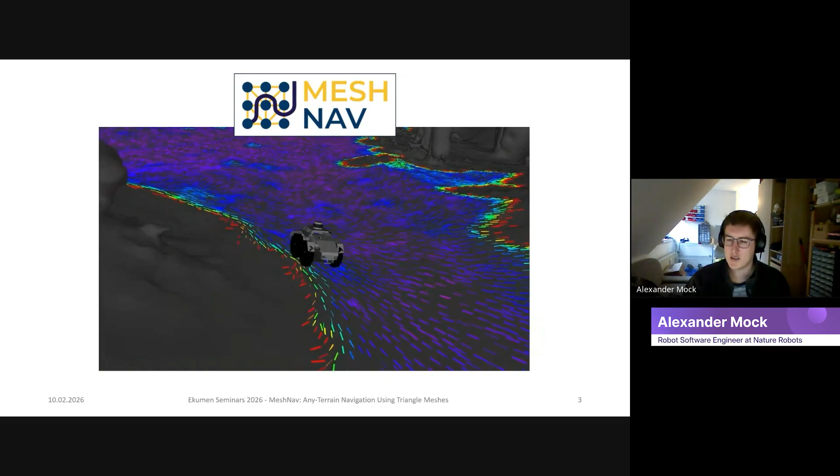But this talk is not so much about me, but about the mesh navigation project, MeshNav. And here you see a video. This is essentially the product of work that is 10 years old. There was a PhD student in my lab when I was a bachelor's student. His name is Sebastian Pütz. And he started to build up this project in 2015, so about 10 years ago. He started to use triangle meshes as representation of the environment, because he thought this would be a smart way to do it. And you can do a lot of cool things with this representation. This is what my talk is about today.

I will tell you why this was, I would say, a good decision to choose triangle meshes for navigation in any terrain. I will start to give a short overview about the theory and what is currently there in our tool set. I will continue giving you some insights about design decisions, how we wrote our software and so on. This helps you perhaps to understand how to write plugins or use it as a software developer.

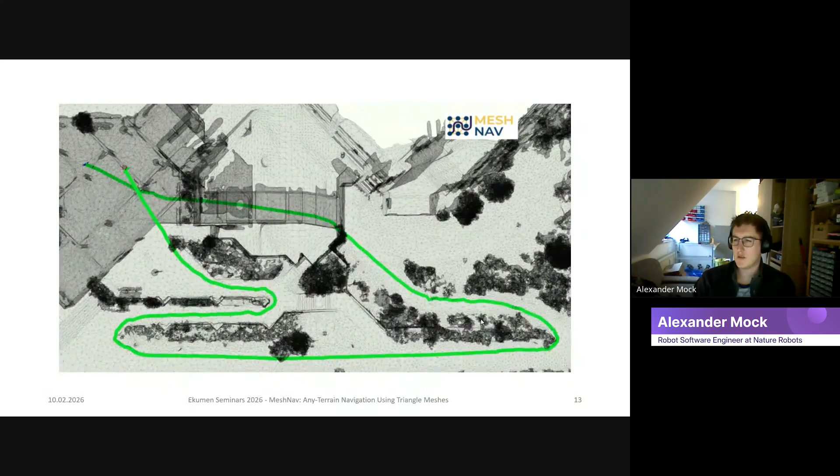As you can see here, once we have this plan and the vector field, we can use the vector field controller to execute the plan. The vector field controller is already implemented, and like the planners, these are plugins. You can also write your own controller or planner. But this vector field controller we already deliver with our mesh navigation repository to start with. It just takes the vector field into account and gives control commands based on that.

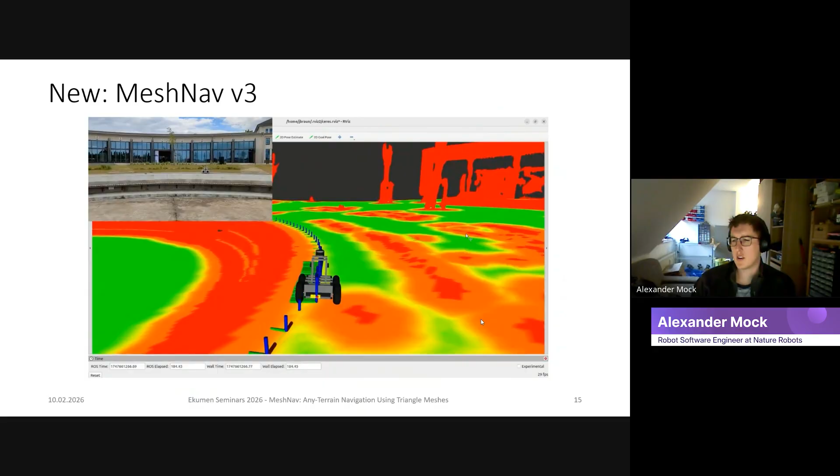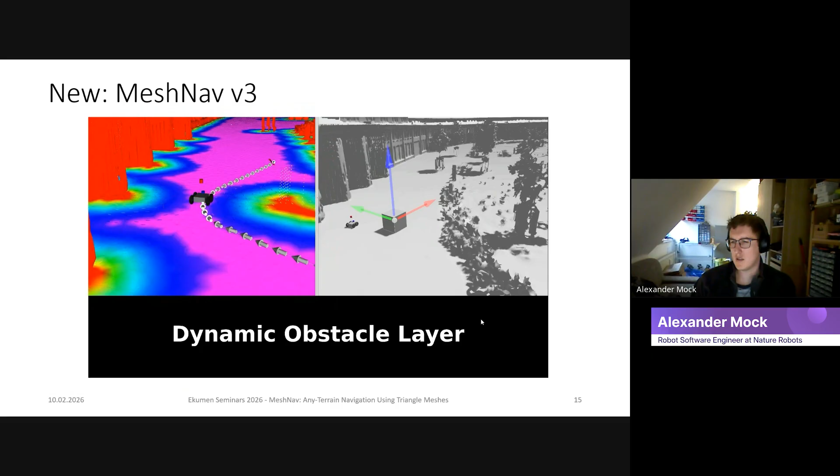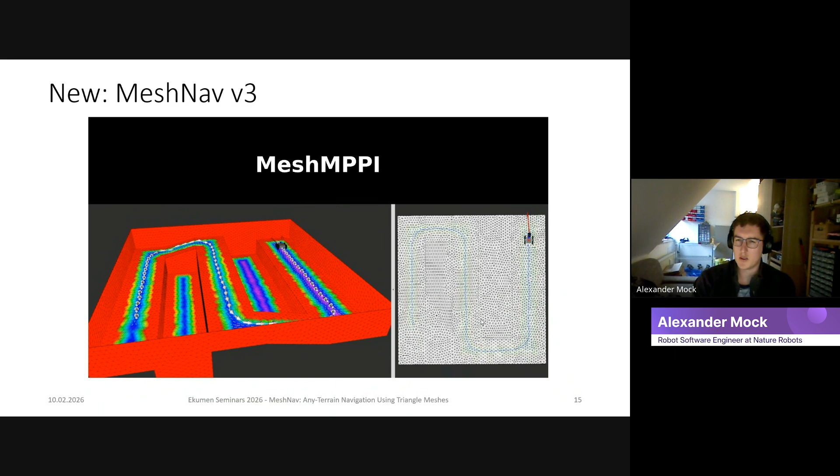And the latest thing we added is, first of all, you see some real world experiments with a small research robot, and we're driving next to a very dangerous abyss. So it could fall down, but it doesn't, just because of the cost layers we added. We added dynamic cost layers here for obstacle avoidance. And we added a model predictive control, which is very new, to make the motion more kinematically feasible. I will come to that later. This is the last chapter.

Also, we have a lot of tutorials there, so check it out if you want. I think over the past half year we made a lot of progress in writing tutorials, also with real world maps. So we scanned a lot of actual worlds, put them into Gazebo, and you can download them and check them out. So that was the overview of what we currently have.

And now it gets a bit deeper. Part 2 is about the software insights. This was learning in progress for 10 years.

As you probably know, when you're writing software, you make a lot of things wrong. And I'm especially very proud that this little project has existed for 10 years. And this is because we learned a lot. And one thing is what you probably already know as a roboticist: we don't want to reinvent the wheel. We look first and act second, like our robots are doing it.

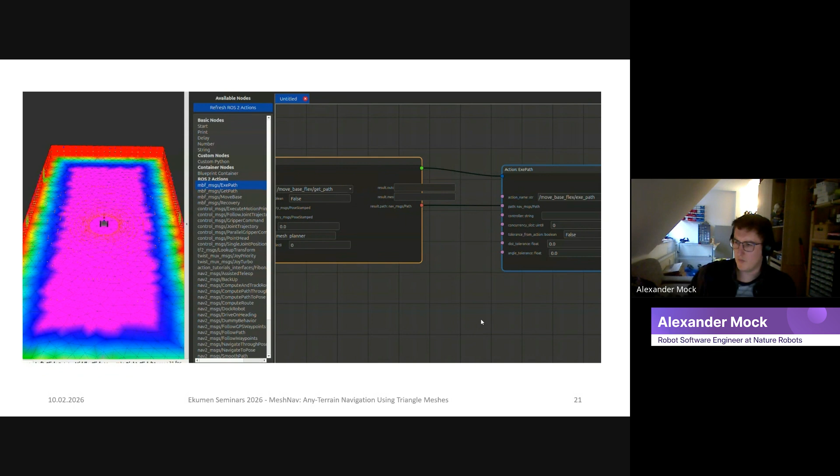So I brought a small example. This is a state machine or some kind of a state machine. On the left side you see the mesh, on the right side it's the state machine, and I connect some things. So wait for pose, get path, then exe path. So this is the most basic state machine you would have for navigation with the MoveBaseFlex action interface.

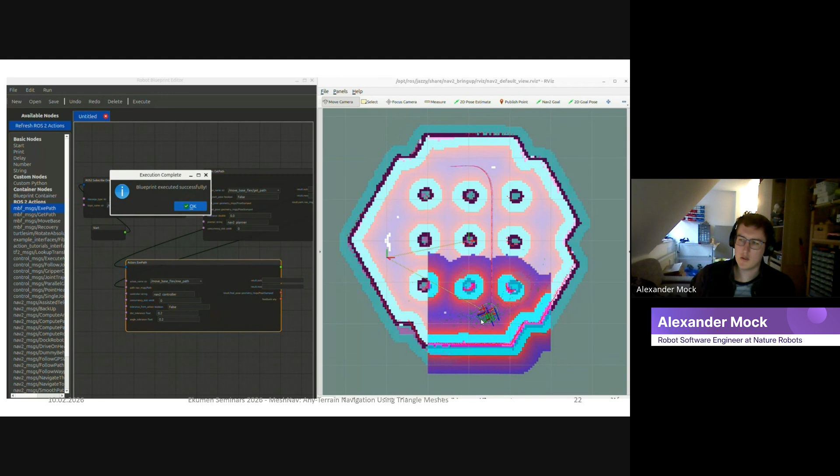And once my pose is drawn in RViz, the state machine is triggered. This is for the mesh part, and now remember how it looks. This is the state machine for nav2. The same action interface, but we just changed the action server and the planner strings. So in this case, the planner is called nav2 planner and the controller is called nav2 controller. On the previous slide, it was mesh planner and mesh controller. And we can control the robot in another world.

So MeshNav also provides code interface plugins, as I already said before. So if you specifically want to write plugins for meshes, like planners, controllers, or cost layers, you can do that.

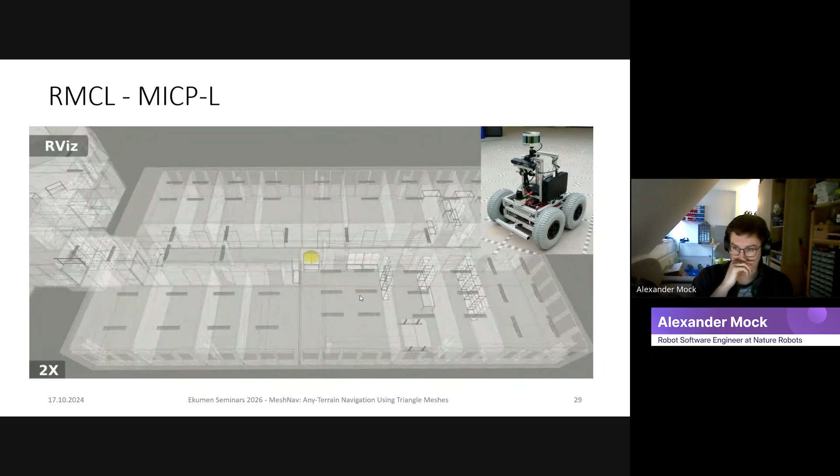And we computed the sensor model via raycasting in a virtual scene using our rmagine, again with established libraries that are already there, and it's very, very fast. So you can see here, for example, the registration part of the localization. We draw an initial pose guess, and the robot is corrected towards the map so that after that it's localized

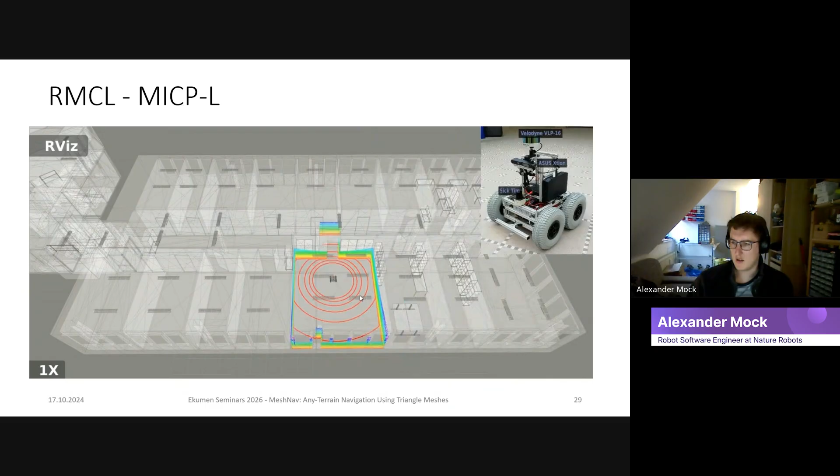using LiDAR scanners, for example, but depth cameras are also possible, as you can see here. It also considers the motion of the robot. We can also use 2D scanners in combination with our wheels, for example, which is quite useful, or any combination of any sensor we have.

And since we are using libraries like OptiX and Embree, we have a really fast runtime. As you can see here, it's an example of the MulRan dataset. It's 21 million vertices and 12 million triangles. It covers an area of about 1,000 times 700 meters, and still we can reach real-time

localization even on CPUs. We couldn't do that if we had started to implement all the things on our own. Intel did a very good job on Embree.

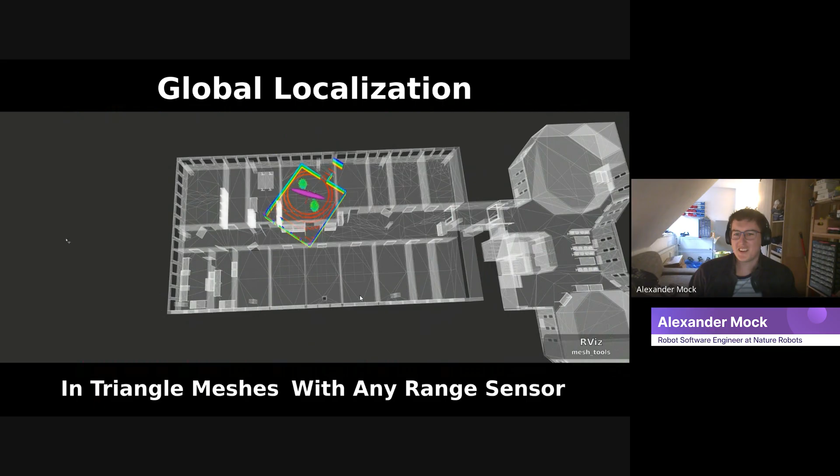And the cool thing is, if something is uncertain, it stays uncertain. This was a thing I was very particularly interested in. If something converged, then we started to estimate a covariance around it so that we can use it for other software that relies on unimodal state representations.

Uncertainty. Once we are localized, now we come to the obstacle part. We directly have correspondences with the map, because we already computed them. As soon as we have them, we can just apply some filtering. As you can see here, every point that belongs to the map is now filtered out.

And we call the points that belong to the map expected points. But there are also points that are not expected given our prior map. And this is, for example, the people. One of them is me, by the way.

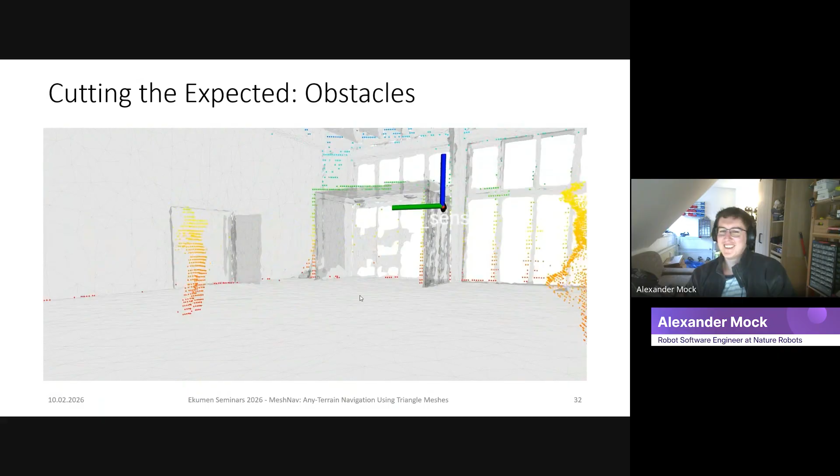Yes, and you can use them and project them down, and then you can create a dynamic cost layer out of it, and that's it. It's very fast, as you can see here. It reacts directly when something is hit, but

there comes the problem. We had to change some things. Normally, you have a large map, and you detect one specific obstacle, and then you start to create some inflation around it. So this is what you want to do. But if you recompute the complete inflation of everything, then it takes some time, and then we have reaction times that are too high to react to certain changes.

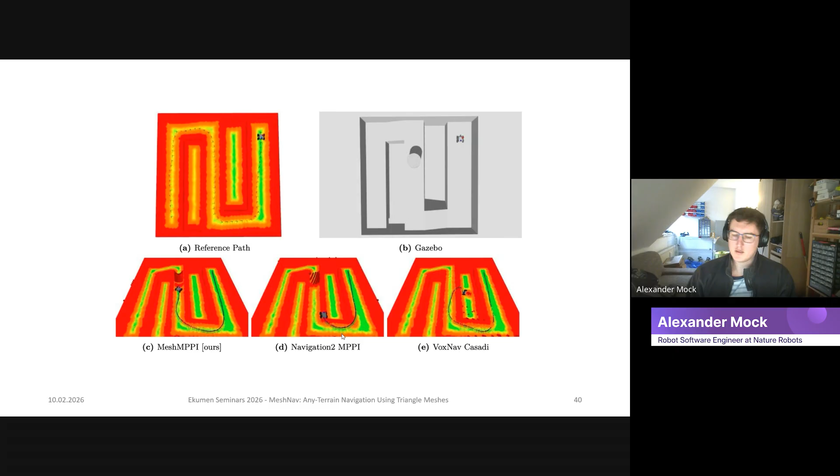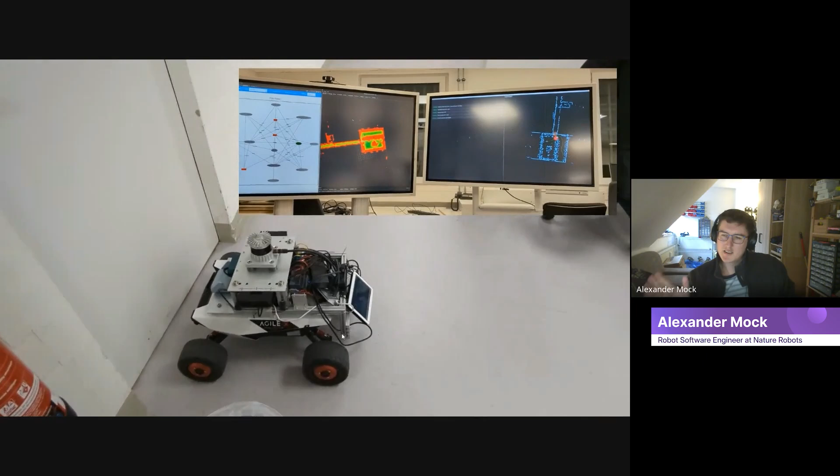And this is the last part. Currently we have a small study group of students and they used the mesh navigation in the basement. There the robot is driving through a door and detects, hey, the door is closed, but in my map it's open. And this is something really cool about the 3D approach as well. Even though you have flat ground, you can have a rich understanding of your world.

Blue points are points that are unexpected, so obstacles. And in this video, you see that the door is closed. In the map, it is open, and the red dots are marking points where the map is unexpectedly wrong. So you would scan through these points in your map. And these red points would mark an area where you can start to adjust your map a bit, so systematically change your map. We haven't done it yet, but the filters are there.

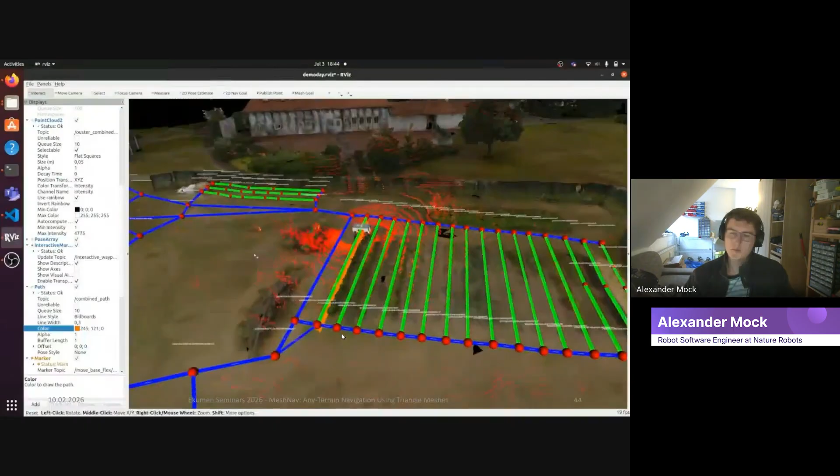Also at Nature Robots, we like to use it to encode some information about uneven terrain. Here you can see our Lero 2. So this is version 1 before. Right now we have Lero 3 built up, and here you can see mesh navigation in combination with a waypoint graph that is used for planning.

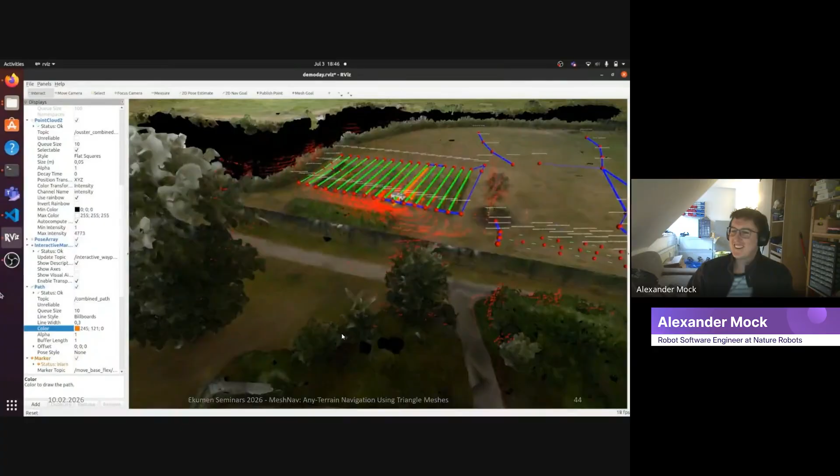And yeah, so it drives over some beds. You can also see here some sensors that are used, like GPS and an Ouster laser scanner. Also some solar panels on top to increase a bit the battery capacity. It can also drive through mud, as you can see there. Yes.

Yeah, the 3D model is still the Lero 1. This was a demo day. We hadn't had any time to create the new 3D model there or to include it. And now it's driving back home, to its garage. And that's it. Here are the worlds again, you can find them in the tutorials, and the robot is driving towards you.

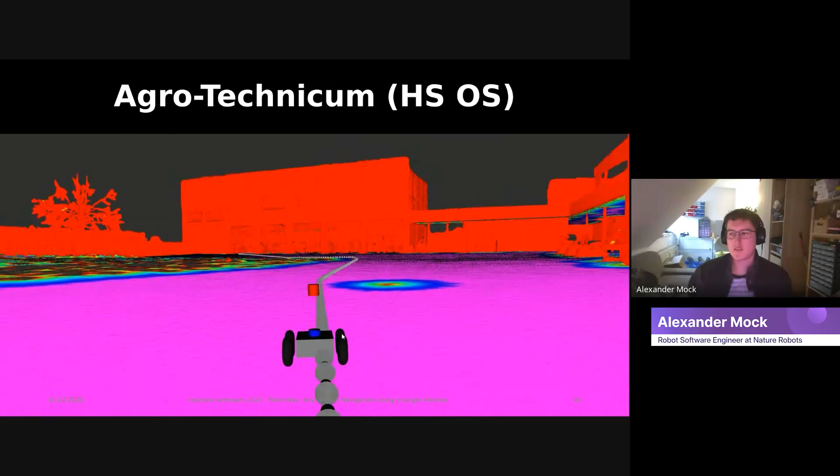So if you want to help with this project and keep it alive for another 10 years, feel free to contact me or just contribute. I would be happy to see people contribute to this project in any way. It could be something like reading the tutorials, reading the documentation, adding something to the documentation, testing this thing in the real world, finding bugs, anything you want to do would help us. So you can contact me anytime, and that's it from my side.

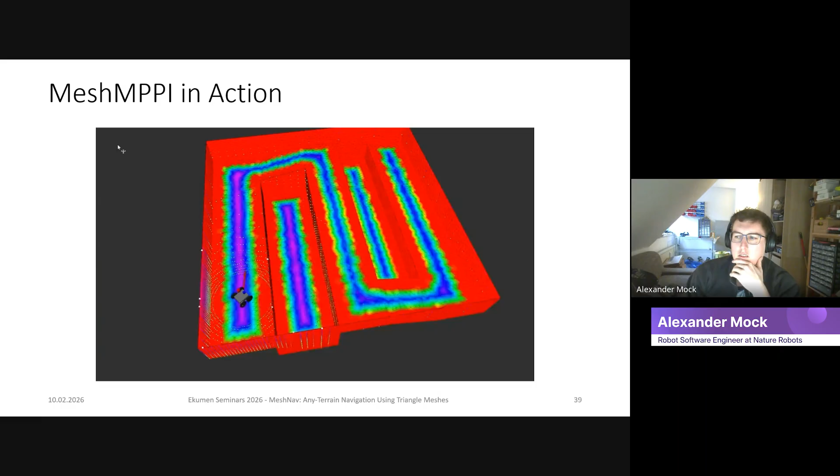Perfect. Thank you very much. That was really interesting. Marco asks, you mentioned that you use CG mesh algorithms as a guide. Based on the problem you solved, were you able to simplify the data structures? Could you repeat the question? So about the data structures. Sure. Marco, do you want to ask the question yourself?

Yeah. To add a little more context, sometimes computer graphics algorithms have a lot of extra information to do some operation. For example, you have a list of the nearby triangles. In the data structure, were you able to remove some unused information for your case, to simplify the original data structures a little? So you mean if there was information not really useful for his particular use case, if he found it useful not to use that? Correct.

Not that I think of. Right now we are taking mesh buffers from PLY files, for example, or OBJ or whatever we can load. This is just an index buffer and a vertex buffer. Then it's converted into half-edge meshes. This is just the connection between those. OpenMesh has algorithms working on these half-edge meshes. We don't use these algorithms. We just use the data structure, so it's just the pointers connecting the vertices.

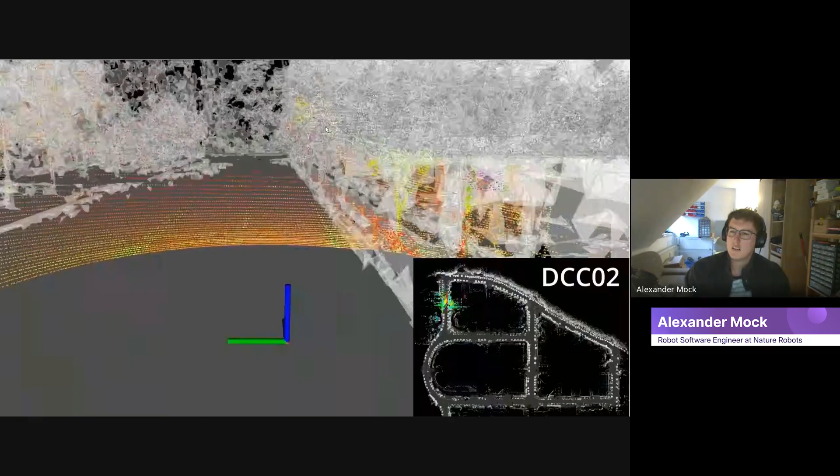Right now, not with the current approach. But maybe we can. Let me go to the video I showed you, I think it's with the door. Yes, this one. Right now the dynamic obstacle layer just takes a point cloud as input, projects it down, and creates costs. So we could also change the input or create a second dynamic obstacle layer that takes the red points as input and projects them down. Like this we could perhaps fill a hole, but not geometrically.

For that, we should do the systematic map updates. This is something we're actually working on right now. We don't want to do these systematic map updates ourselves, so we push the responsibility away, but we want to have the possibility that others can change the map, and that is considered geometrically. So it should be possible, but we don't have any mechanism yet that others can use to change it from outside. Okay, perfect. Thanks.